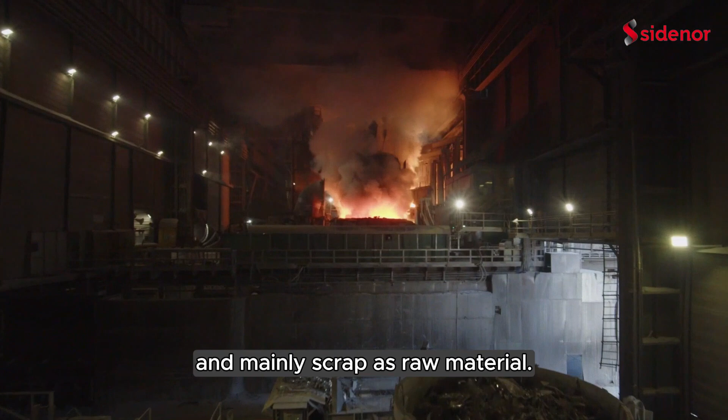These two routes have coexisted for many years, but the current challenges towards decarbonization are changing the situation, as many blast furnace steelmakers are now transitioning to electric arc furnace. This makes sense given the huge difference in emissions between one method and the other, but this tendency also leads to an increasing shortage in scrap, as there is now a higher demand and the supply remains the same.

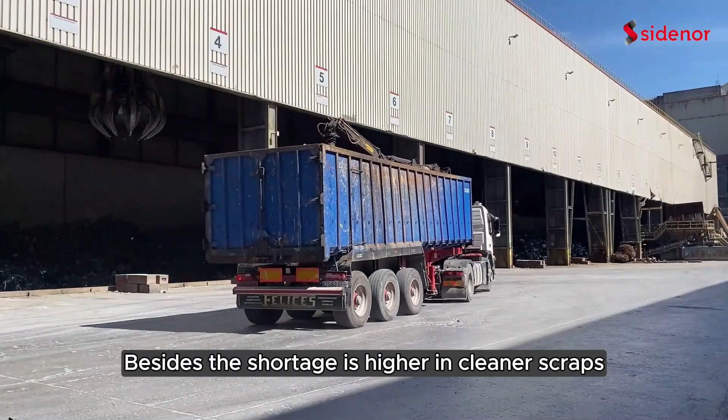Besides, this shortage is higher in cleaner scraps, leaving us with those with higher residual elements such as copper, which is negative for the steel properties and very difficult to remove.

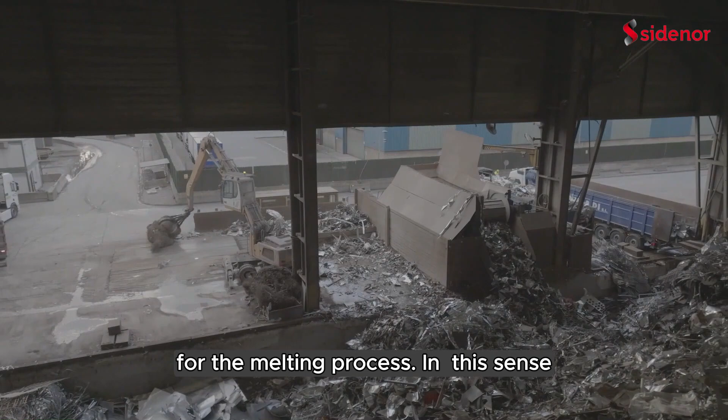This is why it is now necessary to be as efficient as possible when managing our scraps for the melting process. In this sense, we expect that the dynamic and adaptive models developed in the s-X-AIPI will help us improve the ones that we already have.

The developments in this project, such as self-X abilities, autonomous manager, which are being implemented in the steel use case by our colleagues from BFI and MSI, will aid in specific aspects, being one of them the dynamic calculations of copper amount for our different scraps.

These developments will definitely help us adjust to this complex scenario, keep on producing higher quality steel, and continue on the path towards reducing our CO2 emissions.

With over 50 years of experience, BFI is a leading private research institute that carries out applied research for the process industry, focusing on the steel sector.

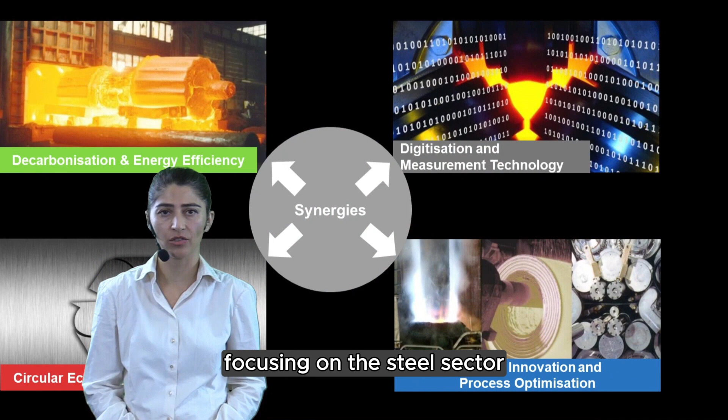The BFI uses its know-how and extensive experience to translate the latest findings into practical and innovative solutions for current and future challenges. As a part of the s-X-AIPI project, BFI is playing a key role in the development of

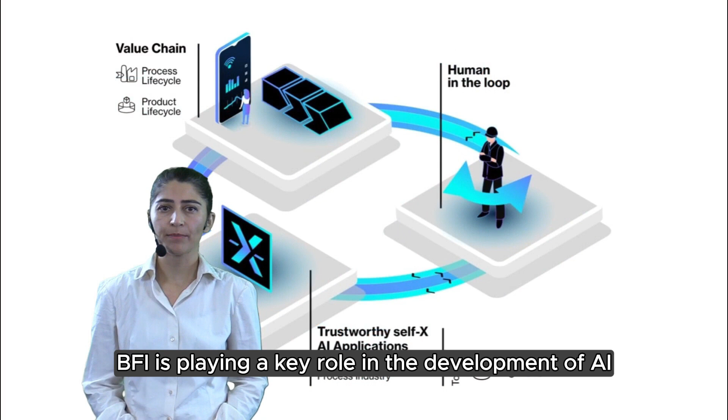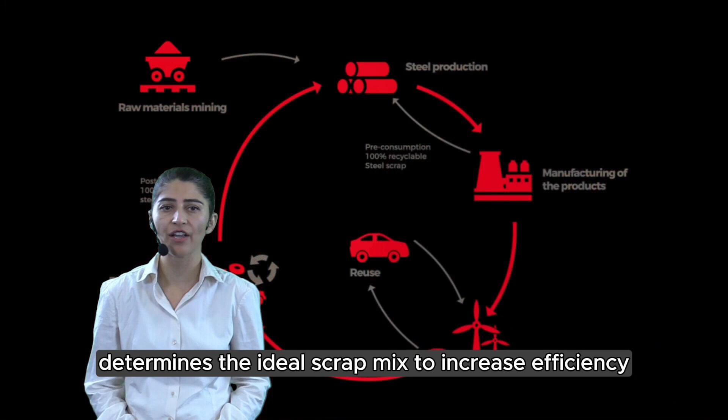AI solution for the Sidenor steel use case, which focuses on improving sustainability and decarbonization in scrap-based steel production in the electric arc furnace. Our AI-driven scrap mix optimizer determines the ideal scrap mix to increase efficiency, minimize cost, and reduce carbon emissions while supporting the production of high-quality steel through this traditional recycling method.

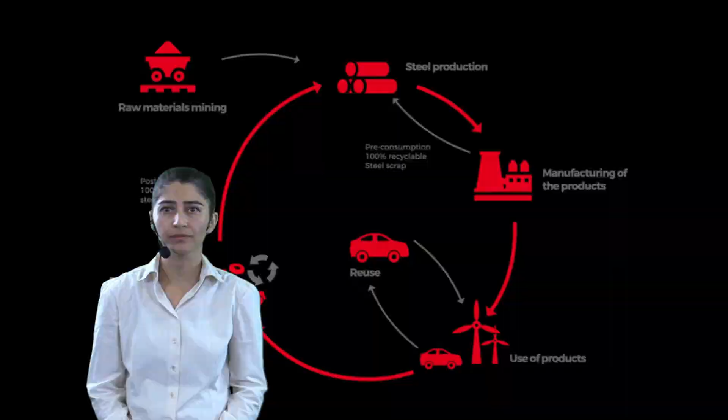MSI is a specialized automation engineering company based in the north of Spain. We are part of Mondragon Corporation Engineering and Services Division.

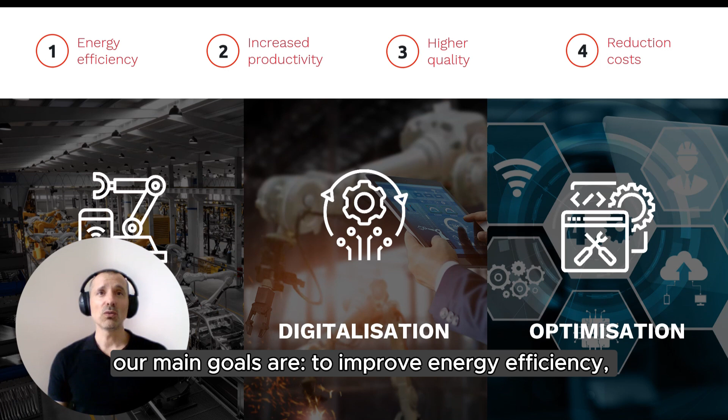Mondragon Sistemas focuses on the automation, digitalization, and optimization of production processes. And by combining these services, our main goals are to improve energy efficiency, boost productivity, enhance quality, and reduce costs.

At s-X-AIPI, we work on the steel use case, focusing on the data management processes such as data collection, data processing, and storage. We work on the integration of the AI algorithms. We work on the integration and communication with the autonomic manager, and we develop and deploy dashboard and DSS systems for process control and monitoring. And this way, we enable the human-in-the-loop interaction.

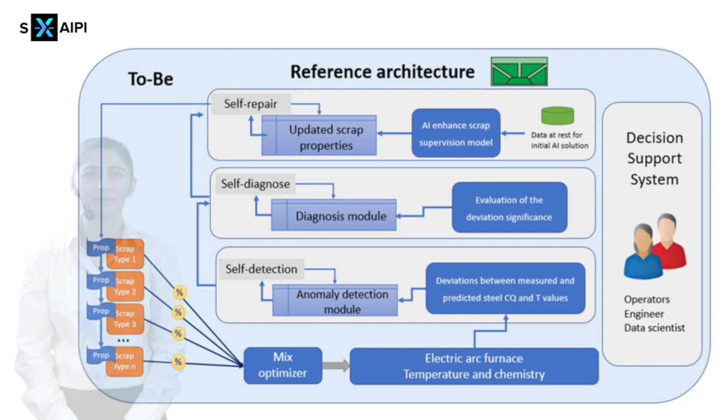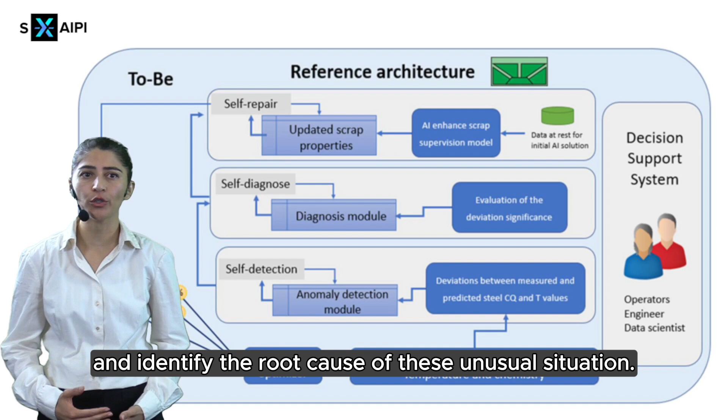The first concern regarding s-X abilities will be focused on detecting unusual situations, which is called anomaly detection, and identifying the root cause of these unusual situations.

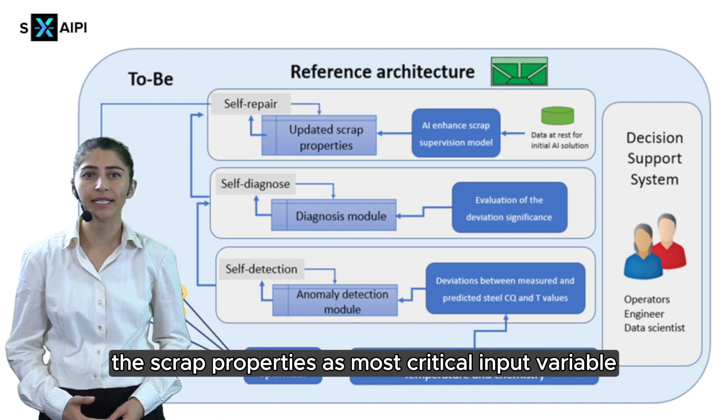Moreover, the s-X ability will rely on a repairing mechanism focused on updating and tracking the scrap properties as the most critical input variable for the developed modeling tools.

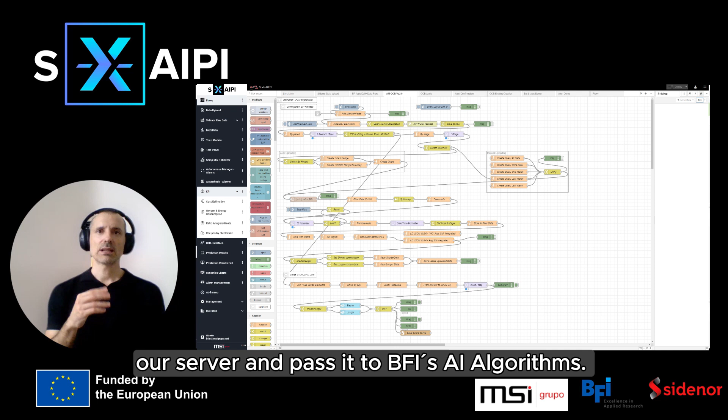What we have achieved until today in the steel use case is to close the whole data flow. We collect the raw data from Sidenor, we upload it to our server and pass it to BFI's AI algorithms. These algorithms give us some output data that we upload to the autonomic manager to be processed by it, and the autonomic manager gives us some alerts.

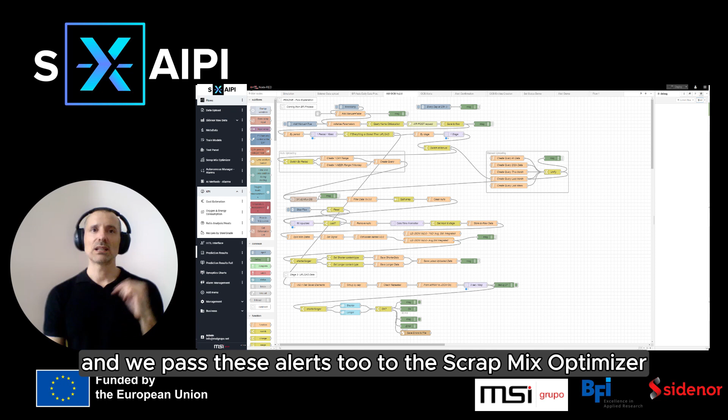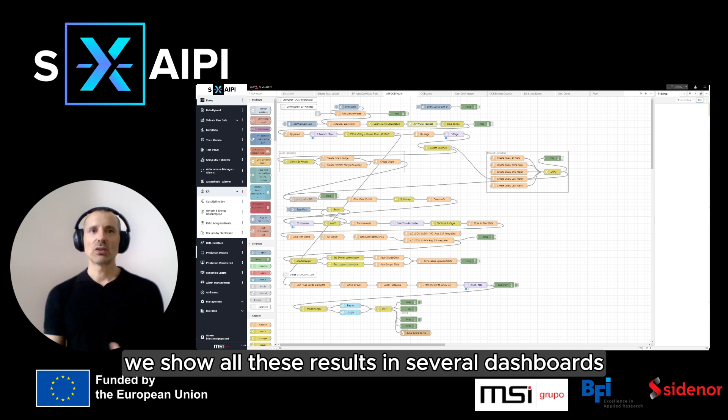Alerting us that something is not working properly in the production process. We show these alerts for human-in-the-loop interaction, and we pass these alerts to the scrap mix optimizer in order to give us another possibility of the scrap mix. And finally, we show all these results in several dashboards, and we show some KPIs too.

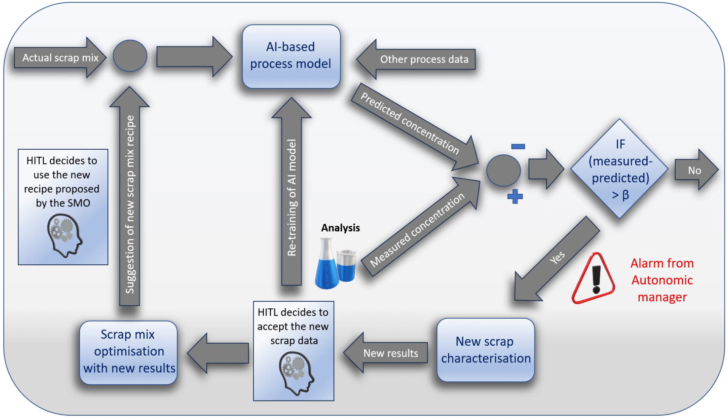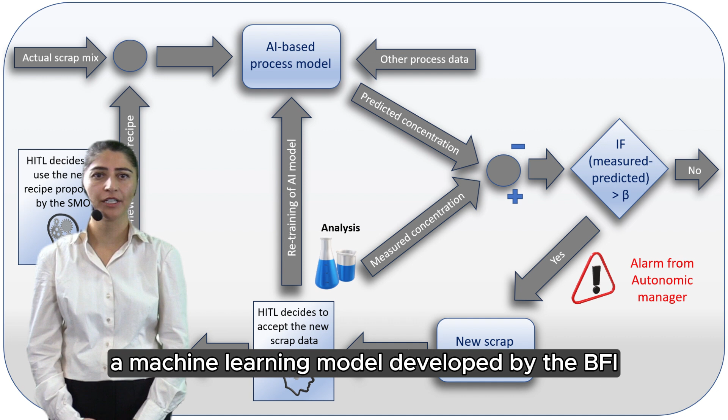s-X-AI detection identifies anomalies by detecting deviations between the measured and predicted steel chemistry. For this purpose, a machine learning model developed by the BFI based on a random forest regressor is utilized to predict the chemical analysis of the steel in the furnace.

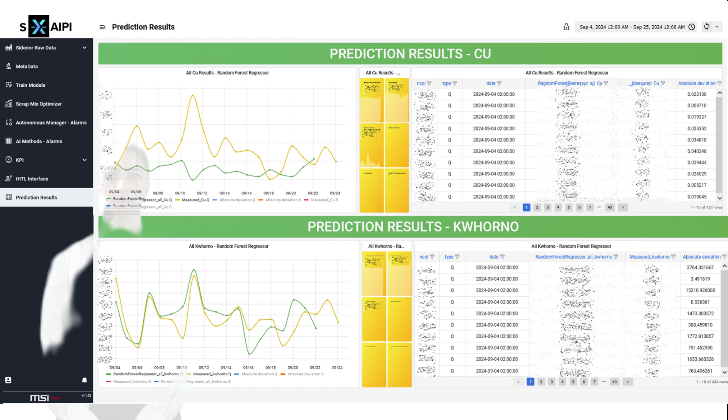The operator can view the results of the prediction models and the measurements of the chemical analysis of the steel in the furnace via the s-X-AIPI dashboard created by MSI.

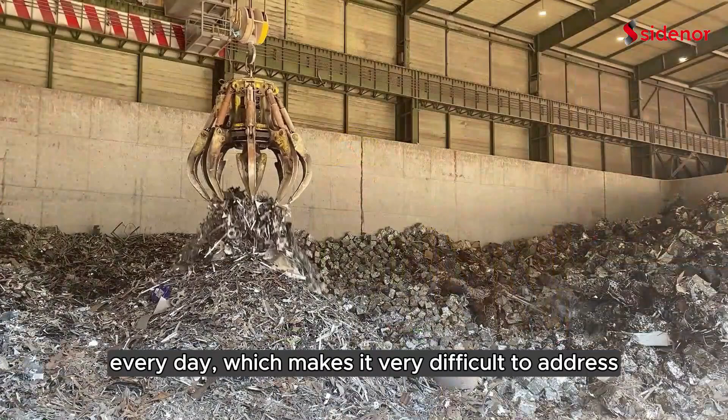Sidenor receives more than 4,000 tons of scrap every day, which makes it very difficult to address the real variation that might exist among the same types but different batches. As said before, it has always been difficult to characterize the different types of scrap and evaluate the impacts in the electric arc furnace.

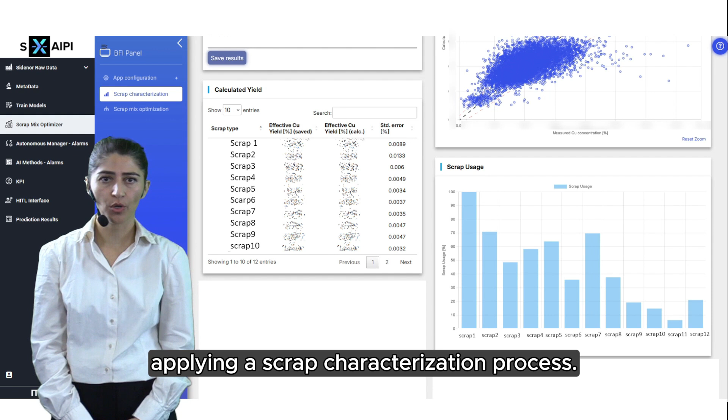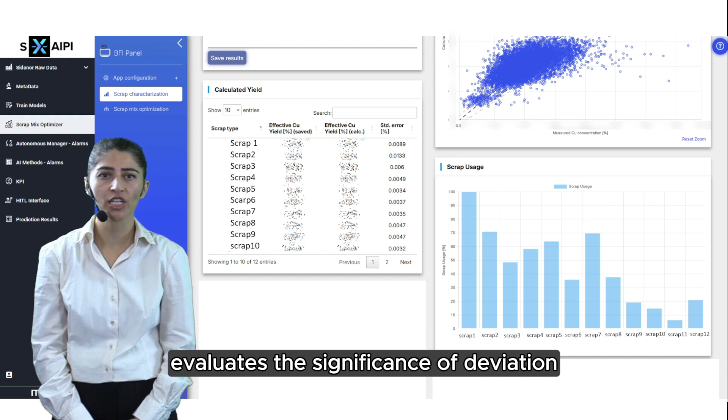For s-X-AI diagnosis, upon detecting an anomaly, the system initiates a diagnosis by applying a scrap characterization process. This involves analyzing the properties and composition of the scrap material used in the steelmaking process. A data scientist evaluates the significance of deviation in the scrap analysis, identifying the root cause of the detected anomaly. This diagnosis provides a clear understanding of how variation in scrap properties have affected the steel chemistry.

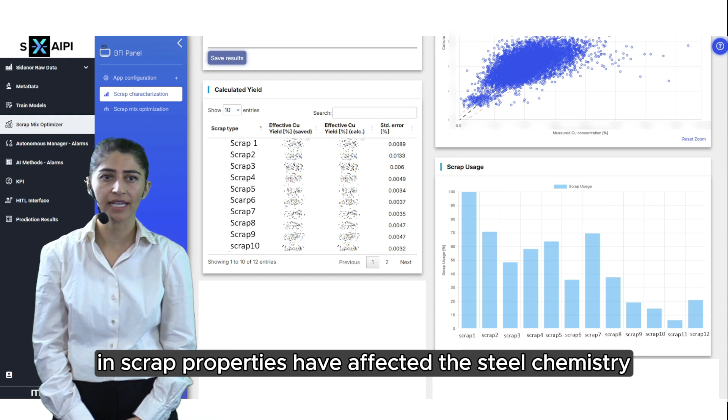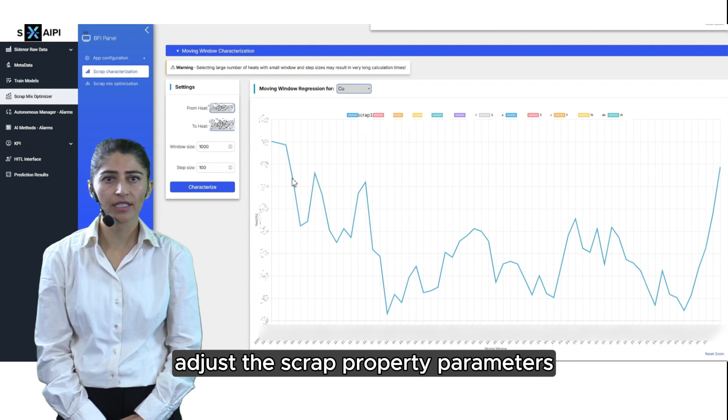s-X-AI repair follows the diagnosis. The system triggers the necessary corrective actions. The corresponding event handler adjusts the scrap property parameters and modifies the scrap mix optimizer to correct the detected issue.

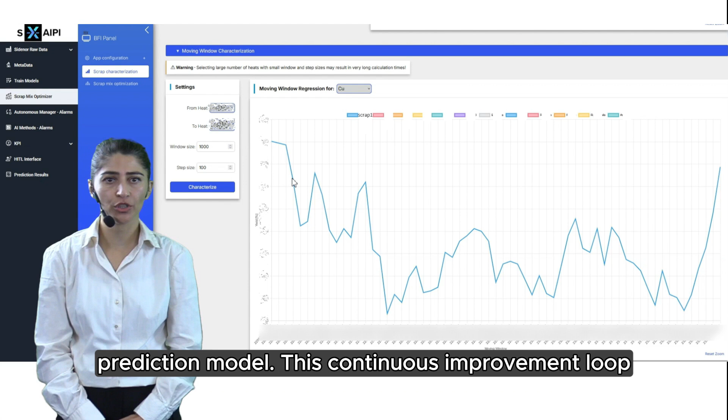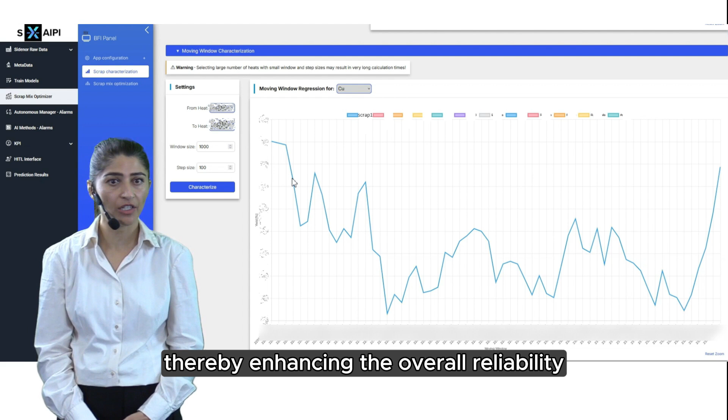Additionally, the system initiates a retraining process for the AI prediction model. This continuous improvement loop ensures that the model becomes increasingly adept at predicting anomalies and preventing future deviations, thereby enhancing the overall reliability and efficiency of the steel production process.

A critical aspect for the steel use case is the recipe for its steel quality. The recipe replies to the question of which scrap type and how much of each type should be loaded into the furnace to achieve the desired quality.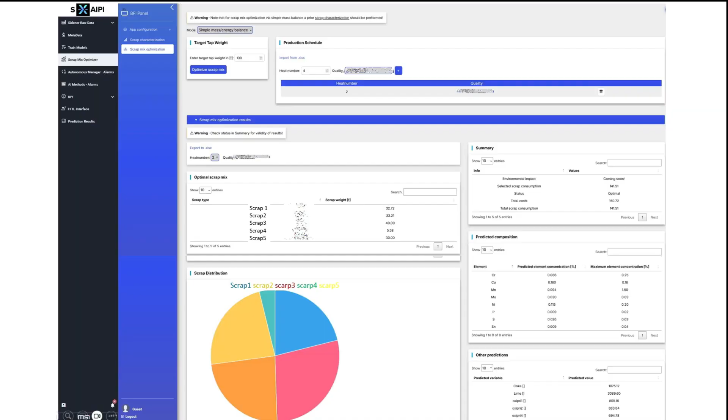For this task, BFI has developed the scrap mix optimization application. Before s-X-AIPI and scrap mix optimization, the recipe selection was based on human expertise. In contrast, scrap mix optimization builds upon an optimization model to optimize the costs and enable efficient scrap reuse.

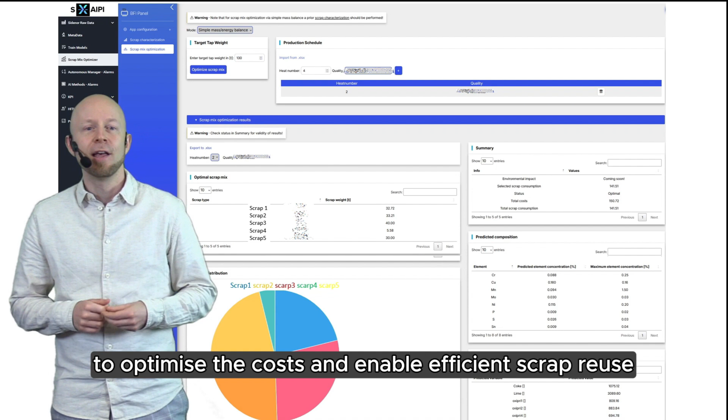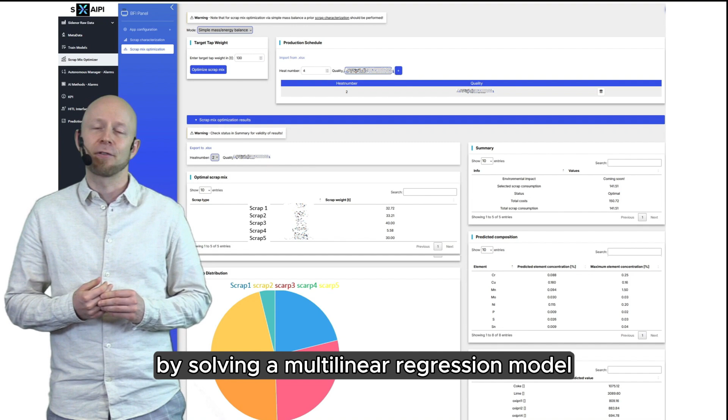To enable optimization, scrap mix optimization requires a chemical analysis for each scrap type. This analysis is based on an estimation by solving a multilinear regression model. Together, these advanced AI-driven processes pave the way towards resilient and sustainable steel production.